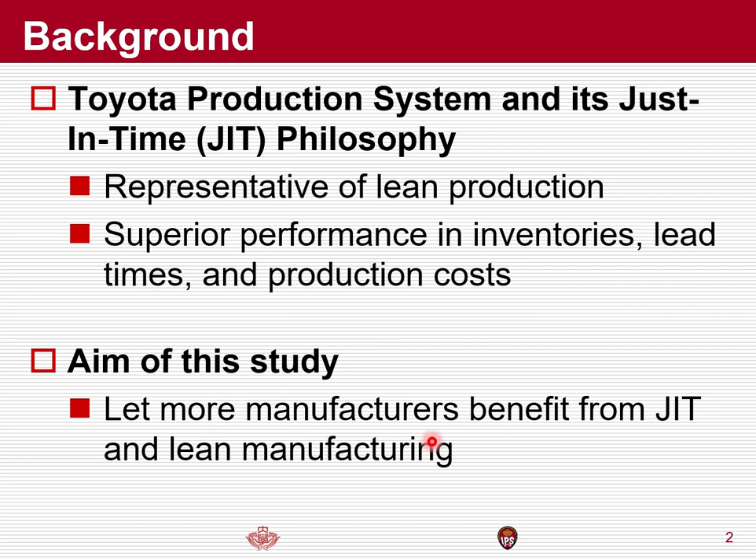First is the background of our study. The Toyota production system and its just-in-time philosophy is a representative of lean production. It is reported to be superior in performance, such as inventories, lead times, and production costs. And the aim of this study is to let more manufacturers benefit from JIT and lean manufacturing.

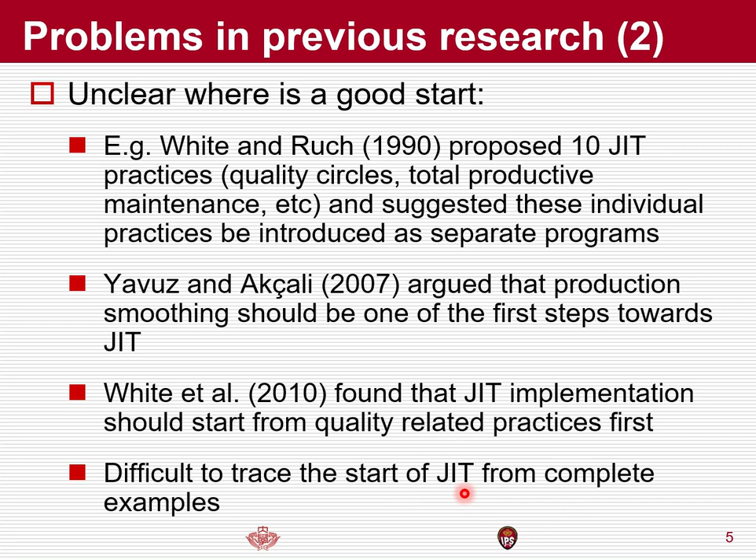And in this study, they argued that production smoothing should be one of the first steps towards JIT. And in this study, it is found that JIT implementation should start from quality-related practices. So it is difficult to tell where to start JIT, what is the best flow or the best practice. And the contribution of our study is to help solve these two problems.

What we have done in this study is, first, we identified cellular manufacturing to have the primary impact on lean performance. So the conclusion is that cellular manufacturing is a good start to adopt JIT. And the second is that we analyzed what CM is able to bring and why. So we can show you what benefits can be expected from adopting CM.

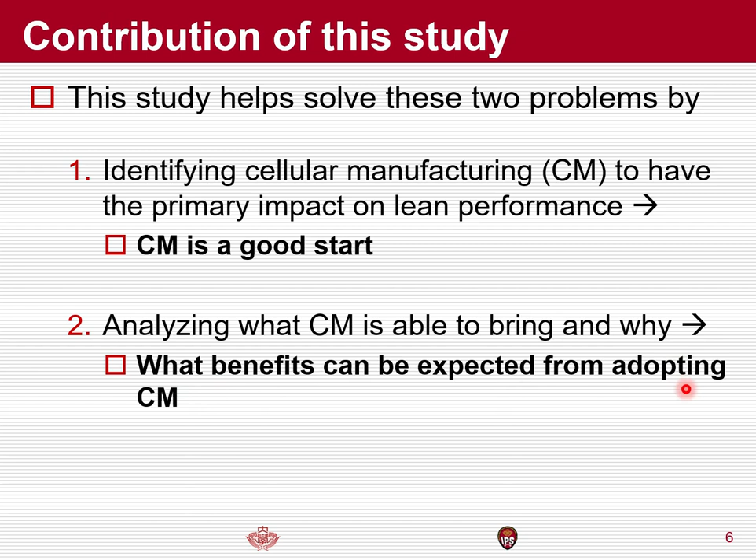So first we give an introduction about the details of cellular manufacturing, CM. This is an image showing the CM manufacturing layout. It means the manufacturing on a shop floor is divided into a number of work cells, each dedicated to making certain products. So for example, product 1 is made in this cell, the product A work cell. And product 2 is made in this cell, called the product B work cell.

And in each cell, there are many steps, each being one process. The raw material starts from this place, goes through all the steps, and finally becomes finished goods, still along this corridor side. And product 2 goes in this cell, in this flow. So the raw material and finished goods are also alongside this corridor. And other products are made in the same way. And these raw materials or finished goods are moved to be delivered to the next production stage or to the customers.

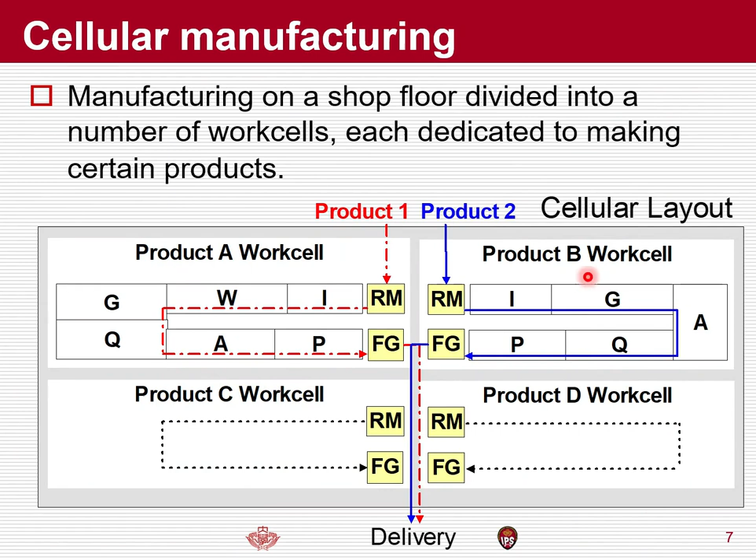The reason is that we have checked the most important and effective elements to JIT success summarized in the literature, and we put all these elements on this figure. And we found that when we move cellular manufacturing to the center, it can be supported by one of the elements, or it can produce the other elements, and it can cover all the elements that are listed in the literature, which are reported to be the most important and effective ones to JIT success.

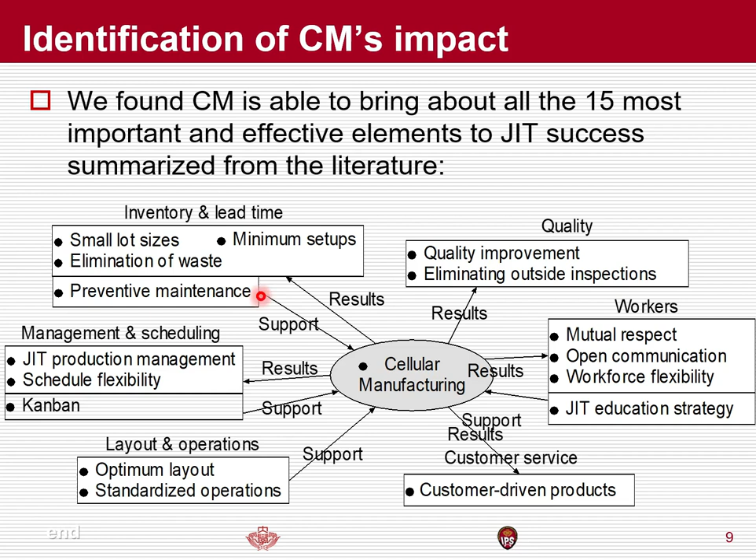And here we group the elements into six groups. And we will introduce why cellular manufacturing can produce or be supported by these elements in each group. First is the inventory and lead time. So this one, and then we will explain respectively about these groups.

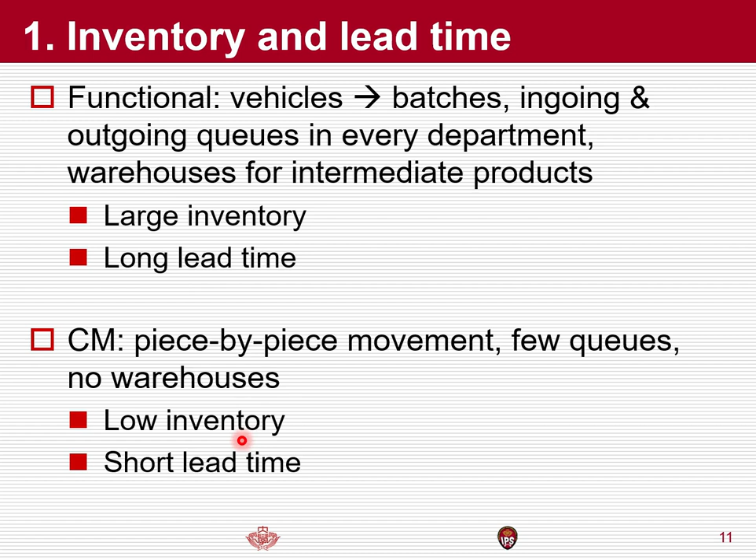So if we use the functional layout, the vehicles will move goods in batches, so it produces ingoing queues and outgoing queues in every department, that is every area. And we need warehouses for intermediate products. This makes the inventory large and lead time long. But in the cellular manufacturing layout, the materials or jobs are moved piece by piece, and this makes the queues little, and we do not need warehouses. Then the inventory will become low and lead time will be short.

And next we talk about quality. The functional layout manufacturing system needs frequent movement, and this will cause some scrapes on the products. And these scrapes or damage to the products are slight, so they may be unnoticed until the final examination. Then when it goes to the final examination and is found, it becomes difficult to know where the cause is, because it is already far from the cause. So the defective rate will be high, and it is hard to reduce the defective rate because it's difficult to trace.

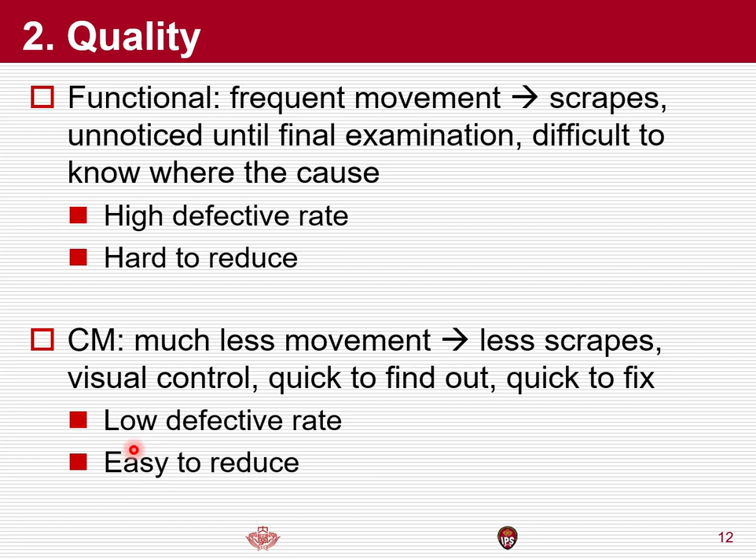But in the cellular manufacturing layout, there is much less movement because every step is very close to each other. So the damages or scrapes will be much less, and we can see where the cause is, and it is easy and quick to find and quick to fix. So the defective rate will be low, and it is easy to reduce the defective rate.

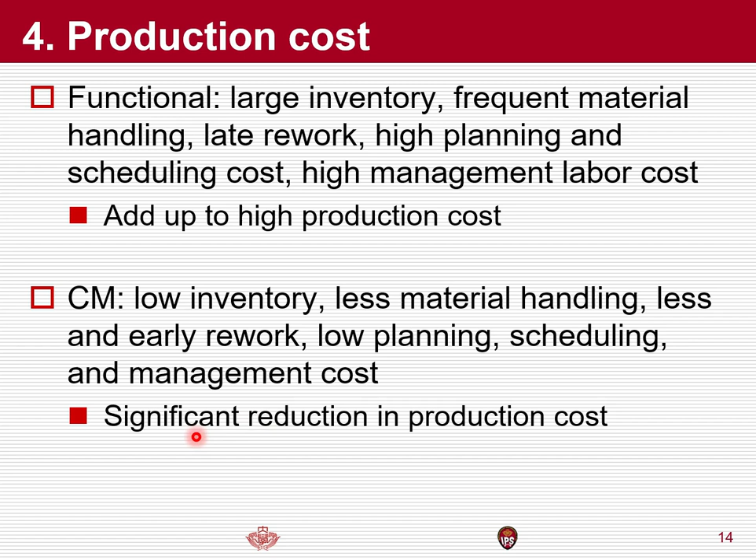Then about production cost. When we use the functional layout, the inventory is large, and there is frequent material handling, late rework, high planning and scheduling cost, high management labor cost. So all these add up to high production cost. But when we use CM, there will be low inventory, less material handling, less and early rework, and low planning, scheduling and management cost. So this will significantly reduce the production cost.

Next, about worker performance. In the functional layout, workers are narrow-skilled because they can only do one kind of work. So they have little sense of achievement, and they are only muscle power. Then they do not care so much about quality because their responsibility is not quality until the final examination step. So this makes the worker performance poor, and there is little workforce flexibility because one worker is only available to do one kind of job.

However, in CM manufacturing systems, workers are broad-skilled. They have a sense of achievement because they can make one product individually by themselves. So the workers may have pride and higher responsibility, and they can use human intelligence to fix problems because they are responsible for many steps. They can check where the cause is and how to fix it, and they can communicate as a team. They are not working alone. So the worker performance may be superior in this kind of manufacturing system, and there's high workforce flexibility.

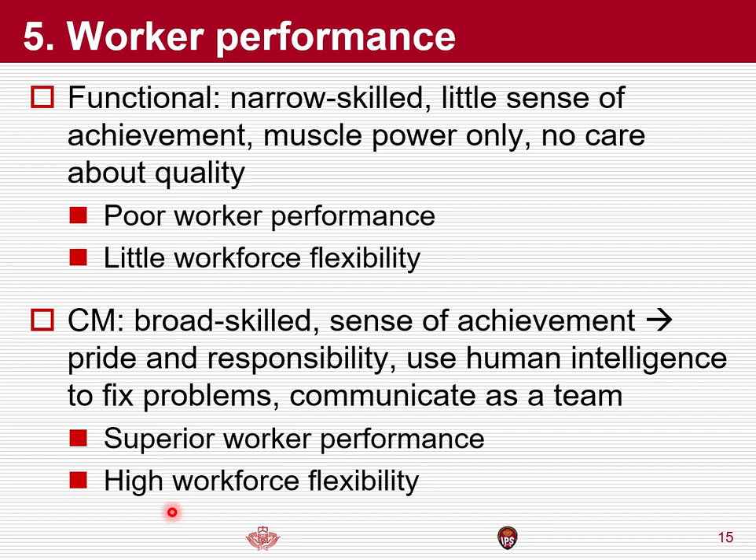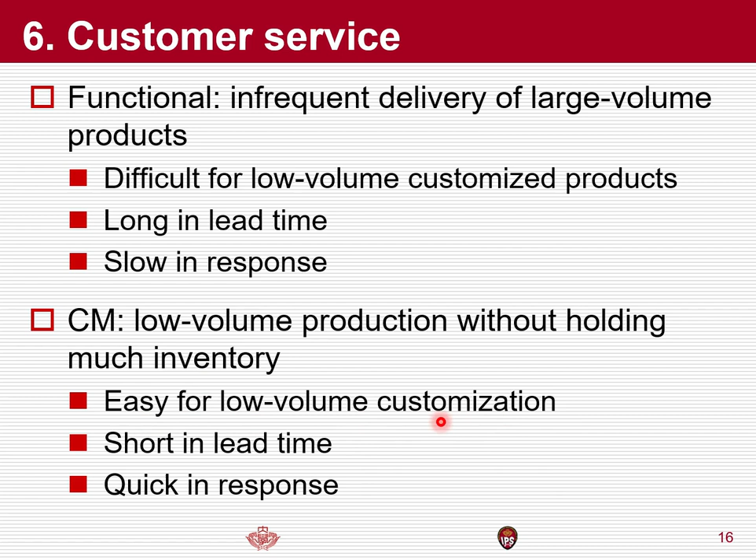And next is about customer service. In this system, because of infrequent delivery of large volume products, customers may need to wait, and it is difficult to produce low volume customized products because each group of machines produces a large batch, so the cost can be low. Otherwise, the cost will be high, and this makes the lead time long and the response slow. But cellular manufacturing systems can produce low volume production without holding much inventory. So it is easy to produce low volume customized products, short lead time and quick response.

And CM is also supported by some elements, including standardized operations, preventive maintenance, and JIT education strategy, which can make the lead time shorter and the response quicker. And these elements are all included among the elements pointed out to be the most important to JIT success. So each point represents one element of JIT success, and we explained why they are all related to CM.

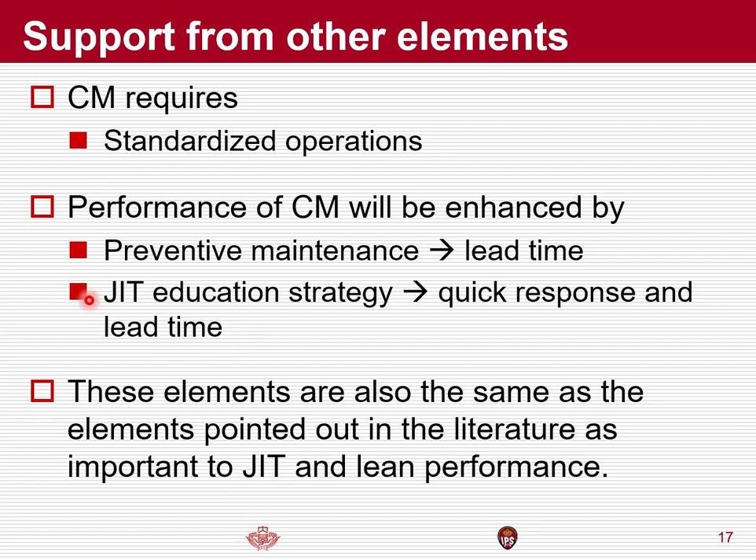So the conclusion is that the analysis justifies that CM either brings or is supported by the most important elements to JIT performance. It has a big positive impact on JIT and is a good starting point for adopting JIT manufacturing. And our analysis clarifies the benefits expectable from transforming to CM from the functional layout, typically job shops.

And for the scope of application of this conclusion, mostly it is applicable to functional layout systems, and most of such systems are used to make high variety, low volume production. So for such kind of systems, CM will be a better choice, and perhaps a much better choice to output JIT or lean manufacturing effectiveness.